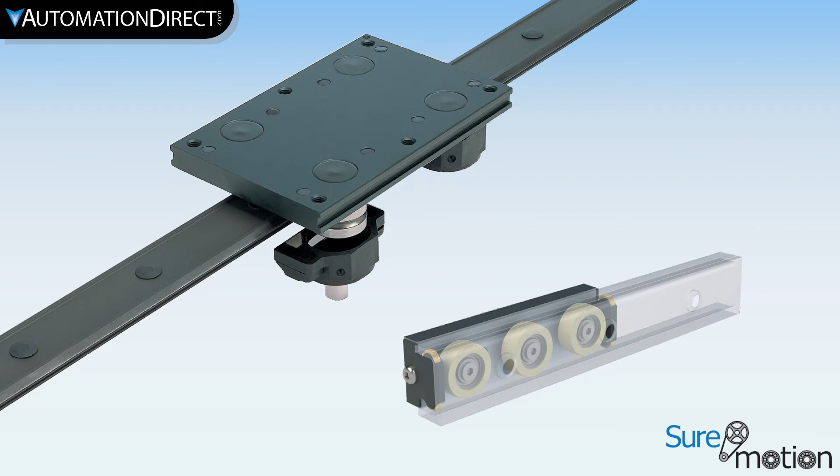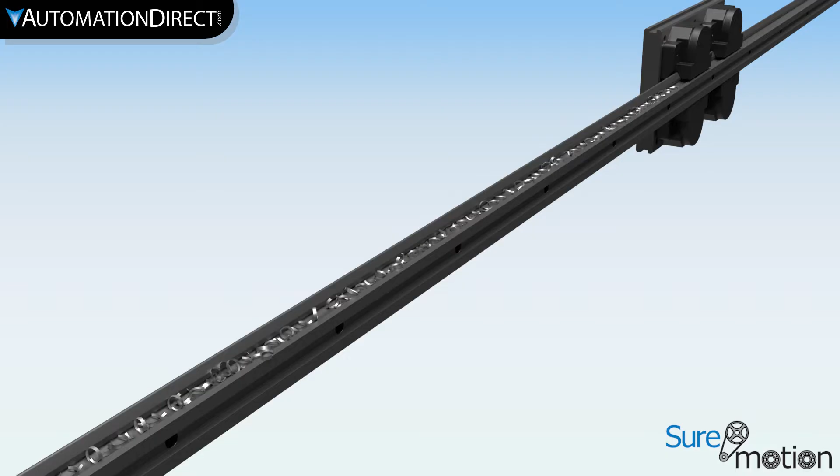SureMotion linear rails from Automation Direct provide a tough and yet forgiving way to achieve linear motion in harsh environments. The LV Series V-shaped guide track is what makes this product ideal for heavy debris environments. Debris simply slides out of the way during linear travel.

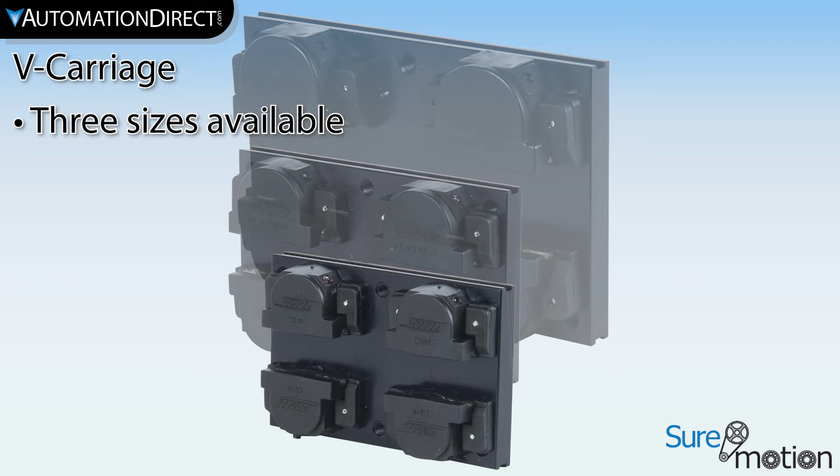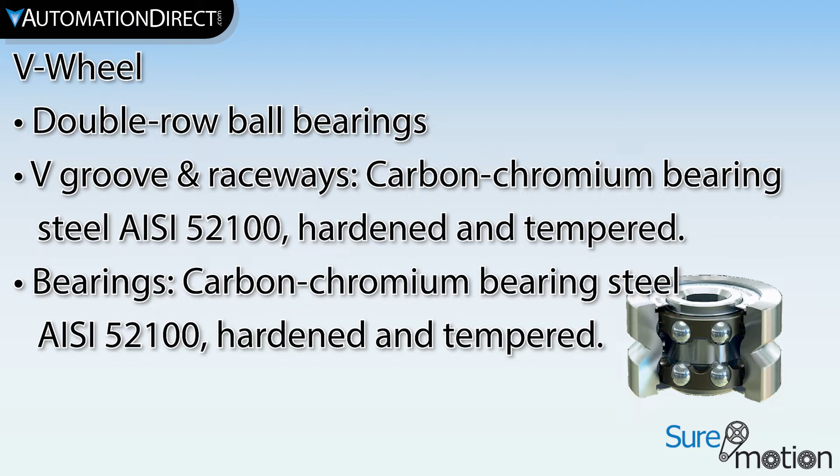High-strength aluminum alloy V-carriages are available in 3 sizes and include 2 concentric and 2 adjustable eccentric V-wheels. These carriage wheels feature double row ball bearings and carbon chromium bearing steel, hardened and tempered, with V-groove and raceways.

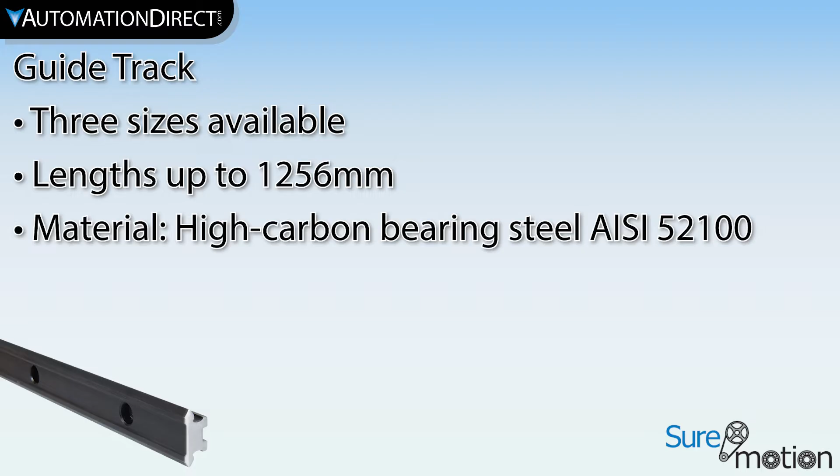LV Series guide tracks are available in 3 sizes, matching the V-carriages, in length up to 1256 millimeters, and are constructed from high carbon bearing steel with hardened and precision ground surfaces.

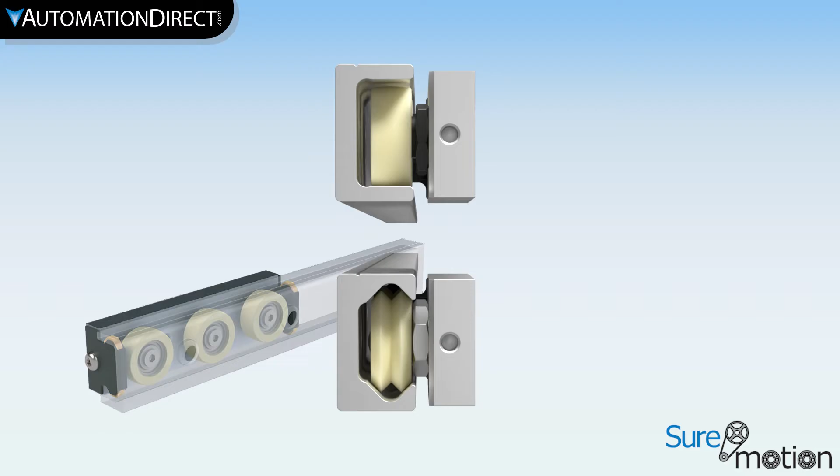The LU Series are available in crowned or double V-shaped wheels and require no lubrication, making these products ideal for applications where there is process debris but no foreign mechanism oils are allowed. The guide tracks and carriages come in 3 sizes and 2 styles, the LUC and LUV, and are intended to work in tandem with each other for better forgiveness when used with unaligned frames and components.

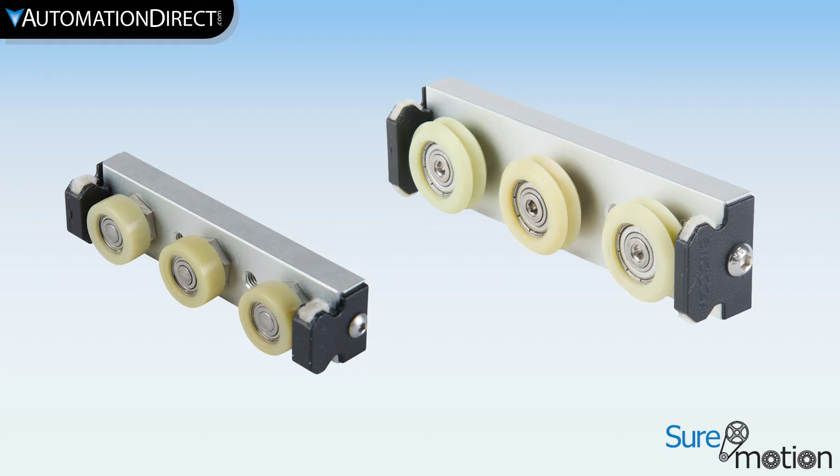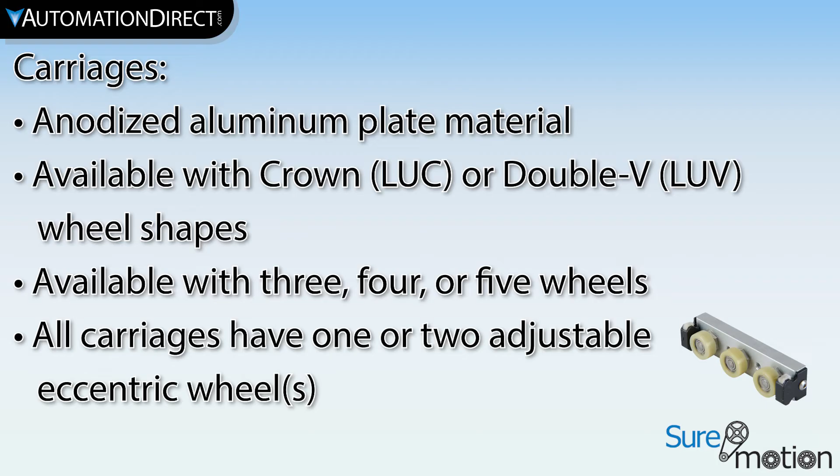Anodized aluminum carriages are available with crown or double V-shaped wheels. 3, 4, or 5 wheel options are offered with 1 or 2 adjustable eccentric wheels and include felt wipers to clear and exclude debris. The wheels include single-row shielded ball bearings, 440C stainless steel hubs, and polymer overmolded tread.

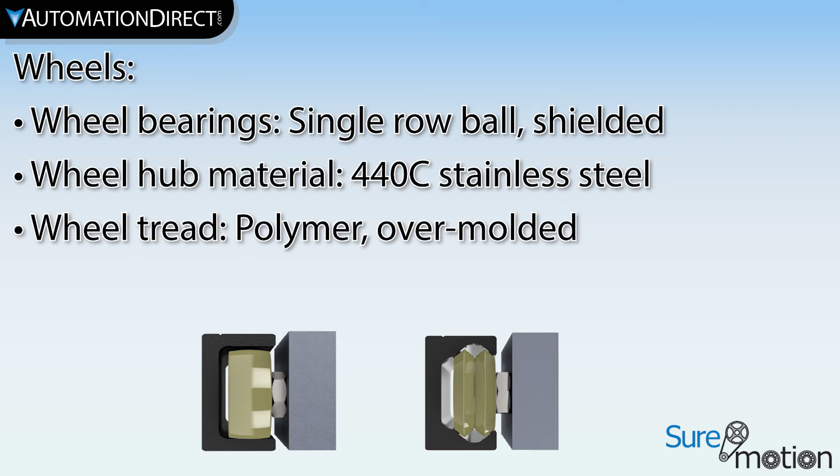The LU Series anodized finished aluminum guide tracks are available in 2 cross-sections, C or V, with lengths up to 1520 millimeters, and can be butted end-to-end for longer travel. All of these features make the LU Series ideal for food, paper, or fabric processing and cleanroom applications.